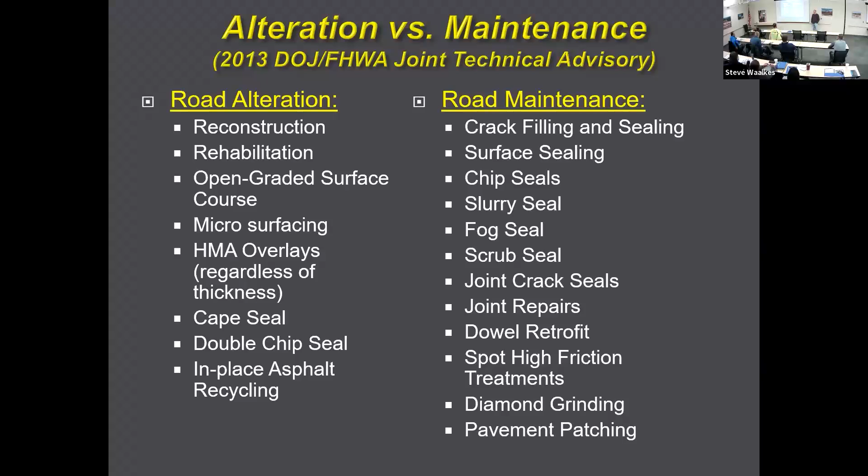However, it's still a maintenance treatment unless two or more treatments contain aggregate or filler. So if you have a chip seal and a slurry seal or a double chip seal, now it triggers an alteration and you have to upgrade the curb ramps. If you just have a chip seal, a fog seal, or a flood coat or something like that, then that would still be considered a maintenance treatment.

But just because it's maintenance and it's optional, it doesn't necessarily mean you shouldn't upgrade the curb ramps. You want to look at the condition of them. Are they in really bad shape? Look at the areas, a nursing home or schools or churches or a lot of walkable community in that area. When you do a maintenance job, you may want to just address the curb ramps as well. So the maintenance is optional.

Okay, ramps to nowhere. So we've all seen this, right? People putting ramps for no reason whatsoever. But you have to look at, are there pedestrian signals there? If there are, you at least have to provide access to the crossing and to the pedestrian activated signal. Is there any evidence of travel? If there's a worn path, then you have to at least provide a curb cut. You at least have to provide access to that same worn path.

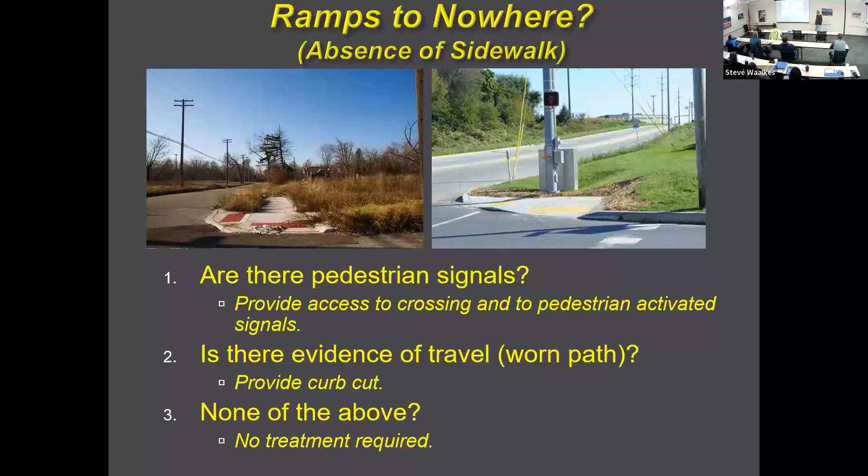If there's nothing there, it's just like grass and looks like there's no evidence of travel, no ped signals, or no ped activated signals, just absolutely nothing there, then no treatment would be required. All right.

So where are you gonna start? Well, you gotta know all the pieces and parts of the thing, right? Start off with the curb ramp opening. That's where the curb ramp's gonna go out into the street. Your ramp runs.

Your landings, where all of your landings are going to go. Your side flares, your roll curb, or even some infield curb there, if you need it. But transitions back to the existing sidewalk. So you'll need something to transition from the compliant, probably curb ramp back to the existing sidewalks. A lot of times they're not compliant sidewalks, so you'll have to warp that transition slab to match up to the existing. And then, of course, the detectable warning surface. So those are all the parts of the curb ramp design and layout.

Site investigation. So a survey is really important. You need to get a good, accurate survey. They're critical for the design and layout of these things. I mean, a little bit off here and there, or they tweak it in the field here and there a little bit, it's like a domino effect, and it can throw off the whole thing. So you want to try to get good design, good survey to lay out these things.

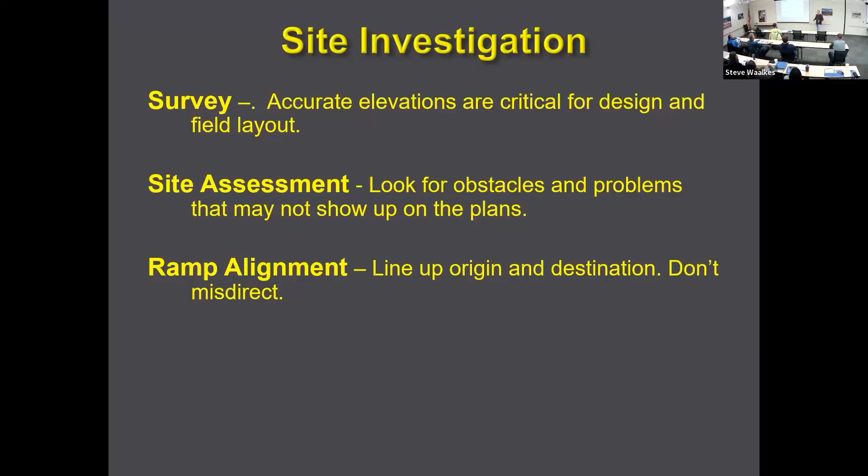Like I say, visit the site. Go out there when it's raining, when it's snowing, like fall, when the leaves are coming down. We're flattening all this stuff out. Things settle where it's flat. So see if the water's ponding. Where's the water going to go if it is ponding? Try to visit the site and assess these things.

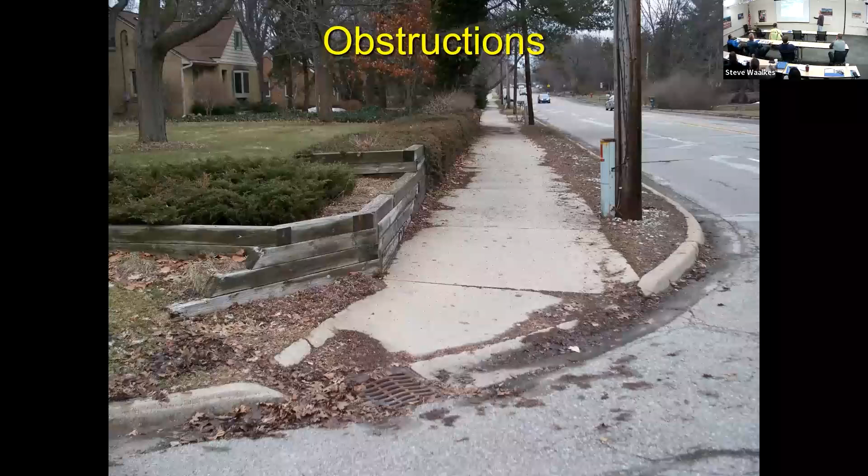Look for obstructions like this catch basin here. That's right in the pedestrian access route. So take a look for things like this. And if it does have a catch basin, does it have an accessible grate on it? An accessible grate has to have a 1/2 inch opening perpendicular, 90 degrees, to the path of travel. So we want to make sure it's oriented correctly.

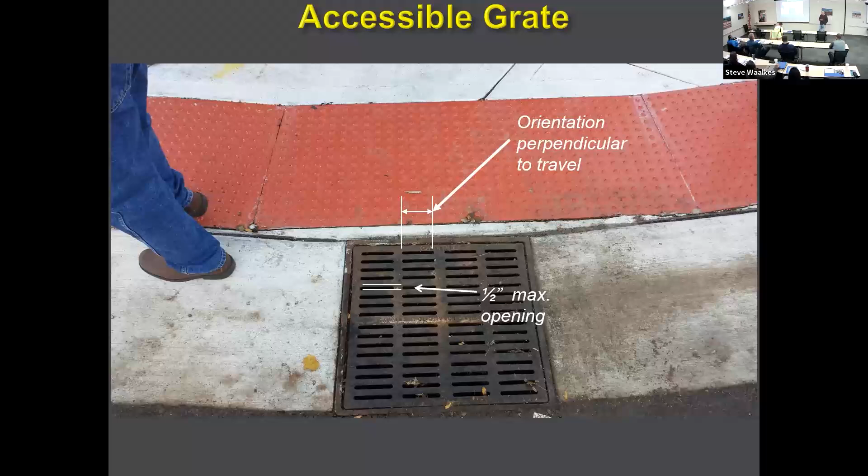And again, these things with the small openings like this can be a maintenance nightmare, right? They catch leaves and trash and all kinds of things and plug them up. And maybe you go out there when it's raining and it's ponding, but they've got one of these that just needs to be cleaned out. So you want to visit the site, check it out, look for these things.

Underground vaults are an obstruction, especially if you're not doing underground utility work. They can kind of get in the way of how to lay out these ramps. Mailboxes and planter boxes, they just put things in the way sometimes without thinking ahead. So that's why it's always a good idea to go out and visit the site, get a good, accurate survey so you can lay them out correctly.

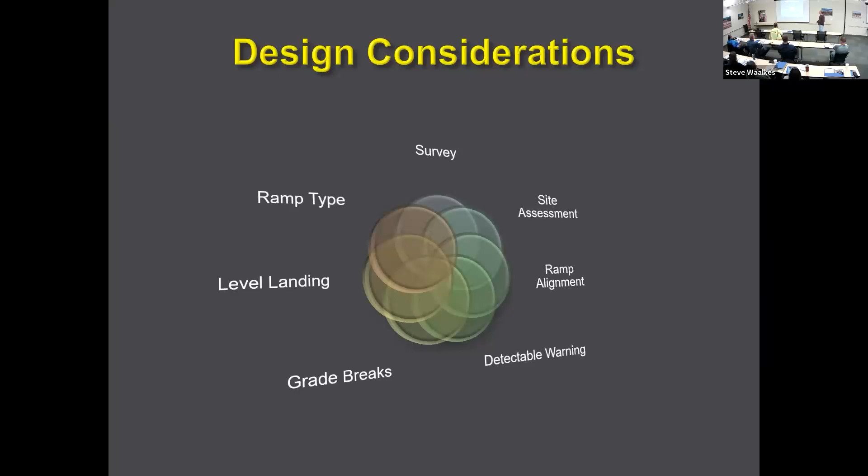Okay, so when you lay these things out and you're doing design, these are some things you want to consider. Obviously, the survey, like we talked about, how important that is. A site assessment, like I just went over, visit it. Ramp alignment, the detectable warning surface, about not misdirecting, and where that's going to be. The type of ramp you're going to put in there. Is it going to be a directional or a depressed corner or whatever? Where the level landings are going to go, and obviously the grade breaks. So these are things that you have to consider when you're designing curb ramps.

Okay, so I'm going to go over a few slopes and runs and cross slopes here in the next few slides. And I just want you to get in your head that there's no construction tolerance on the maximums or minimums on these things. So you want to allow for construction or finishing inconsistencies. For example, we have an 8.33% maximum running slope. That is the absolute maximum running slope. Anything above that is non-compliant. Actually, anything above that, they run the risk of flipping over backwards. They have a lot harder time getting up the ramp. So you want to design for something less than 8.33%, like 7 or 6 or something like that.

And then when they build it in the field, if it does go up, so let's say you design at 7.5 and in the field it ends up at 8, well, it's still compliant, but you allowed for some finishing inconsistencies that were laid out in the field. So you want to try to give them some wiggle room. If you design at 8.33%, boy, they've really got their feet to the fire there.

Same thing with the 5% maximum counter slope. That's the maximum counter slope between the road and the ramp. If it gets worse than 5%, they can get their caster stuck at the bottom. They could tip over. Their footrest could hit the bottom and get stuck there.

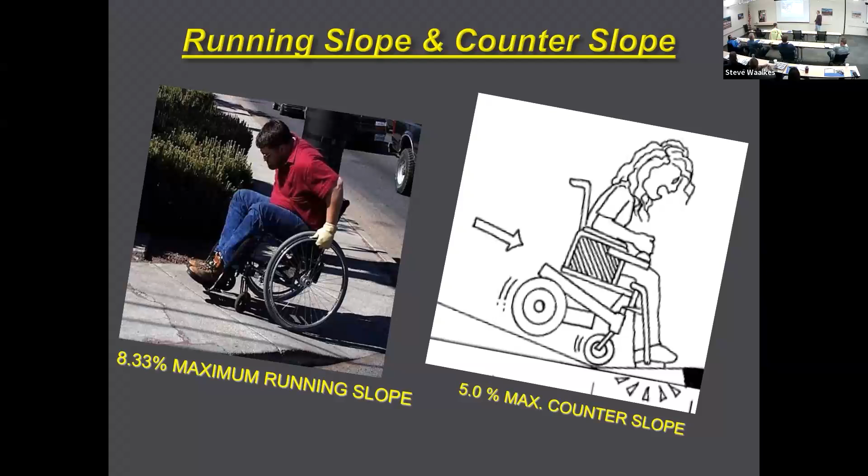Same thing with the 2% maximum cross slope of the ramp and sidewalks. The maximum is the 2% cross slope. So you want to try to design for something less than that, 1, 1.5, try to flatten it out. With anything steeper than 2%, they've got to work really hard on the one side just to try to keep their chair going straight down the sidewalk.

And of course, with the snow and ice that we get here in Michigan, if it's steeper than 2%, if they stop or something, they could just slide right off and get stuck in the grass on the side. So you want to try to design for something less than the 2%. And then it gives them some wiggle room out in the field when they actually build it. But anything more than 2% would be non-compliant.

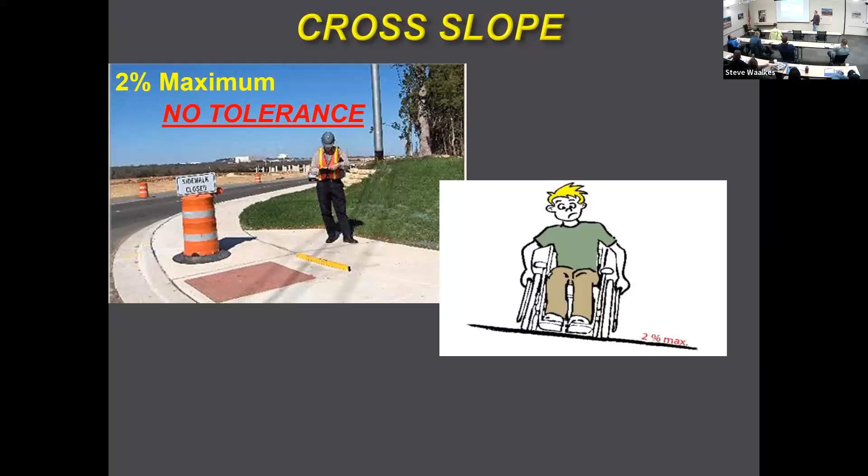Okay. The minimum ramp width is 5 feet. We try to build everything here 5 feet in Michigan. It can be reduced to 4 feet if 5 feet is not practicable. 4 foot is allowed by the draft PROWAG. But we try to build it at 5 if it's at all possible.

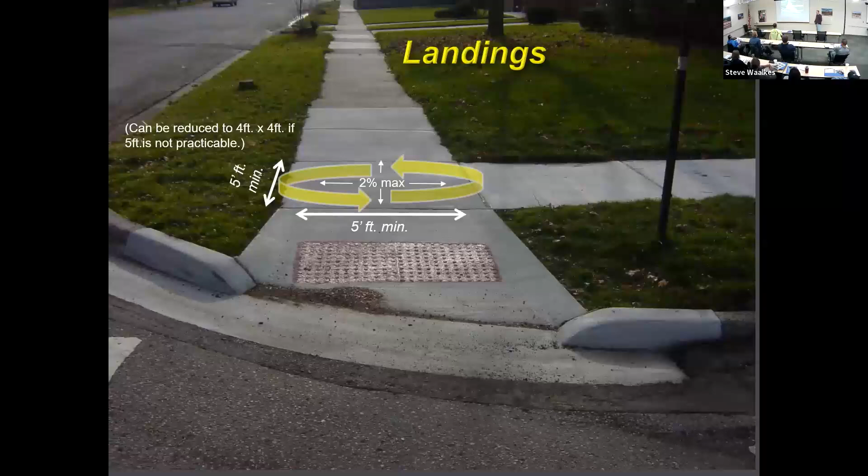Same thing with the landing. The landing is 5 by 5 with a 2% cross slope in both directions. Again, it can be reduced to a 4 by 4. But keep in mind that the 2% cross slope in both directions for a landing is the absolute maximum. So if you can make a landing 1.5 or 1% or something less than 2%, always try to do that. But a 4 by 4 landing is also acceptable if 5 foot's not practicable.

All right, detectable warnings, why do we need them? Well, it advises a change from pedestrian path to vehicular path. So basically it's saying you're leaving a safe area, now you're entering into a dangerous area where vehicles are. It's not a wayfinding device, so we don't want to use a detectable warning surface to point them where they want to go. We want to use the ramp to line up origin and destination. And at MDOT, we have a qualified products list that people can go on and look at that we allow on our projects.

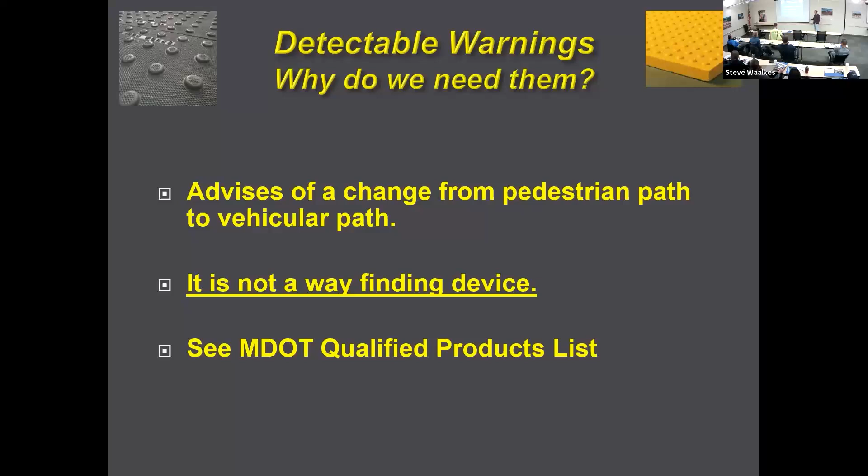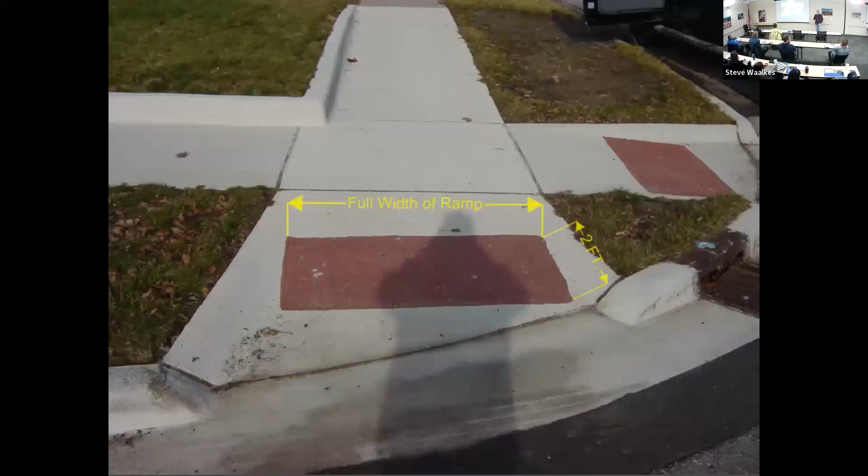That froze up here. There we go. If all else fails, look at the laptop because there's just a little bit of a lag. Yeah, I've seen that. I've noticed that. Yep.

Okay, so the detectable warning surface has to be the full width of the ramp, 2 feet wide at a minimum. And you want full continuous coverage where the curb has been removed.

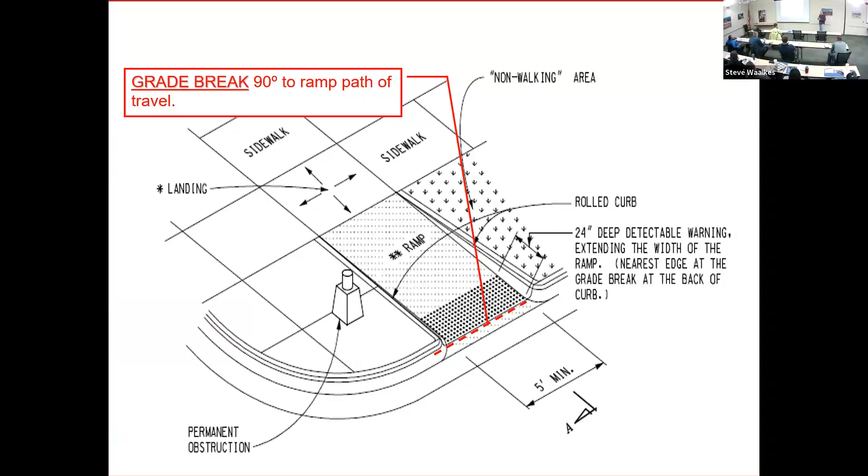So where do you put the grade breaks, right? We have a lot of different grade breaks on these things. You always want them 90 degrees to the ramp path of travel. You'll have them sometimes at the top, at the bottom, at the landing, sometimes you have 2 or 3 or more grade breaks. But you always want to have the grade break 90 degrees to the ramp path of travel. You don't want them skewed.

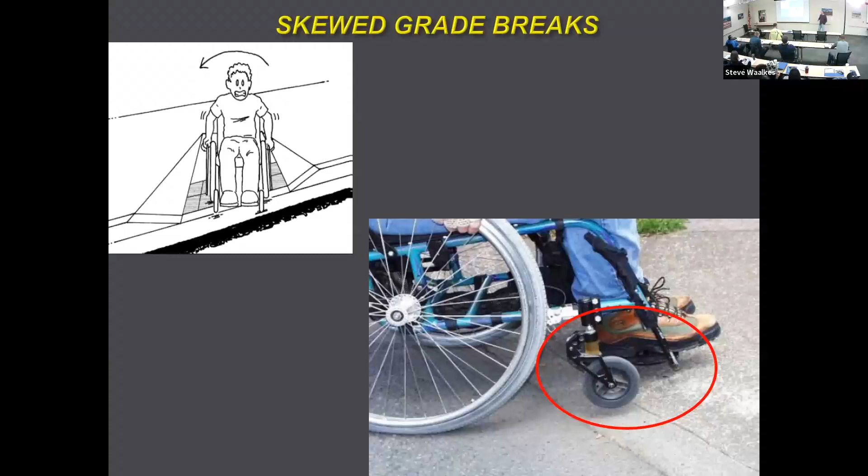Skewed grade breaks are a problem. They can cause the chair to tip, wobble, and all kinds of things. Sometimes they'll get a caster stuck at the bottom because they're on a skew, or they can actually tip over if the skew is bad enough. So we always want those grade breaks 90 degrees to the ramp path of travel.

So how do you achieve a 90-degree to the ramp path on a radius? Well, you move the grade break back. You just move it back some to get that 90 degrees. And that little funky triangle that you get in the radius there, you just want to maintain that as a 2 to 5% running slope. So they'll be able to go over the grade break straight ahead, and then they'll have a nice smooth flush transition out into the roadway.

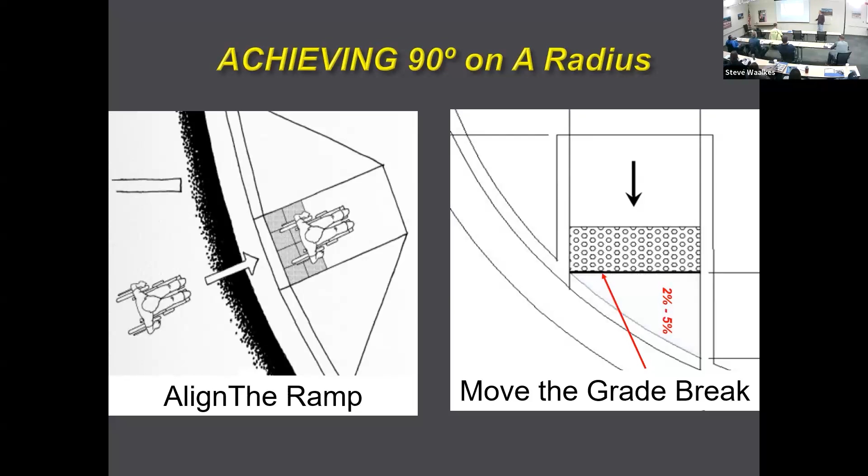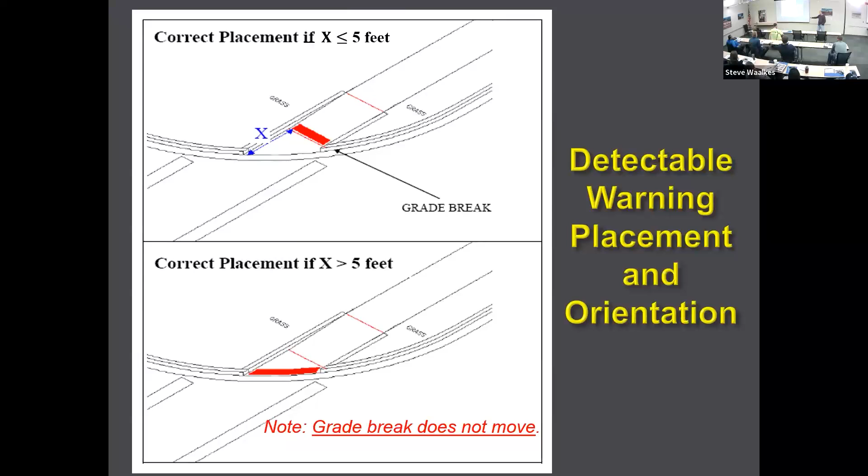So if you have to move the grade break back 5 feet or less, then the detectable warning surface can go behind the grade break. If the grade break is greater than 5 feet, so the grade break goes way back because it's on a radius, then you want to bring the detectable warning surface to the back of curb. And you notice that the grade break's not moving, just the detectable warning surfaces. So you always want to maintain that 90-degree ramp path of travel so they can get over it easily. And so you want to move the detectable warning surface. So if it's less than 5 feet, leave the detectable warning surface behind the grade break. More than 5 feet, bring it up to the back of curb.

And you can also truncate these things. They don't necessarily have to go around the radius, they could be truncated. But if you truncate it, you can have 2 inches at the ends of the radius, and you still want to maintain full continuous coverage across the entire opening of where the curb has been removed. All right.

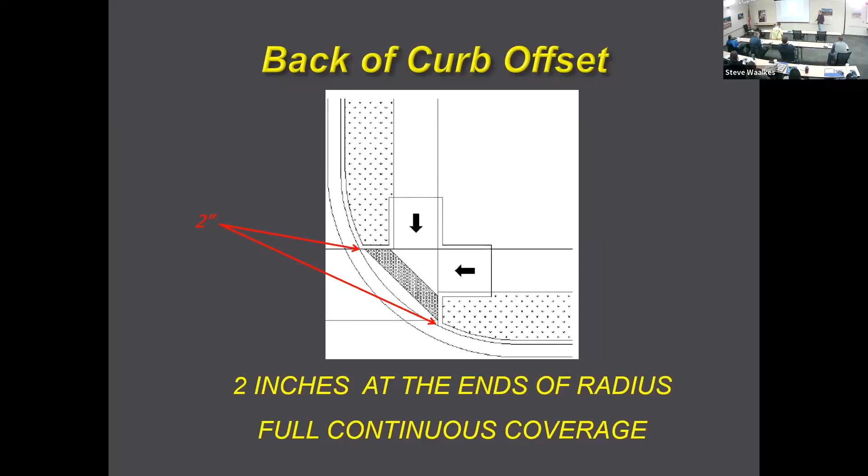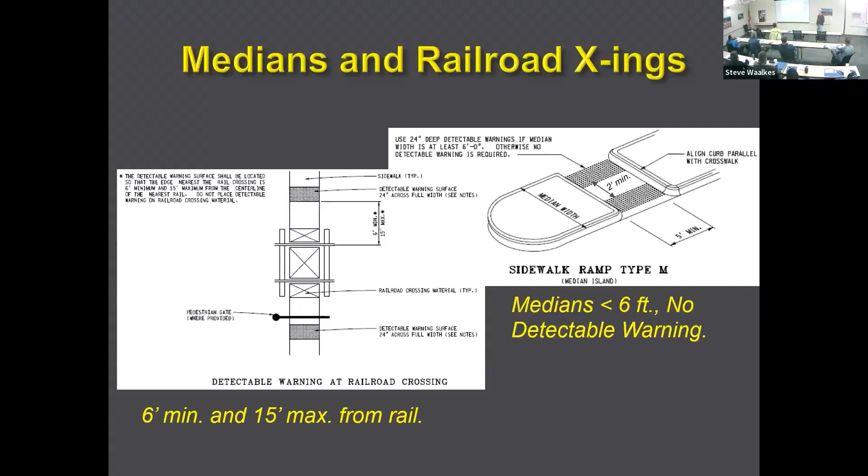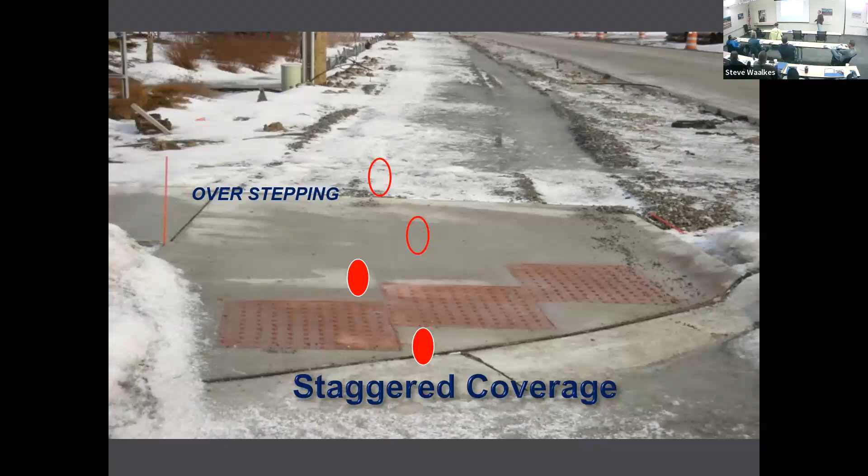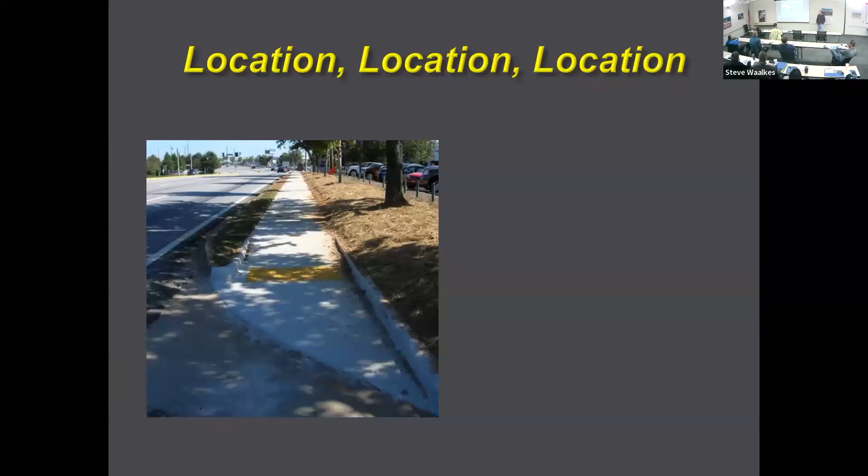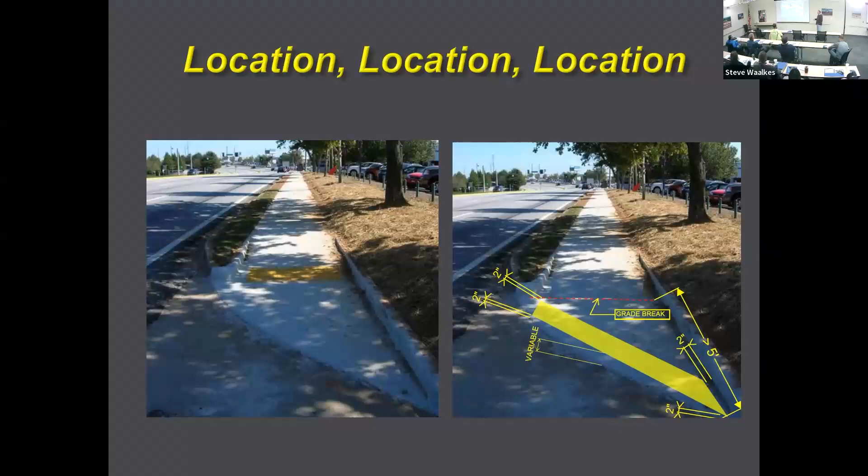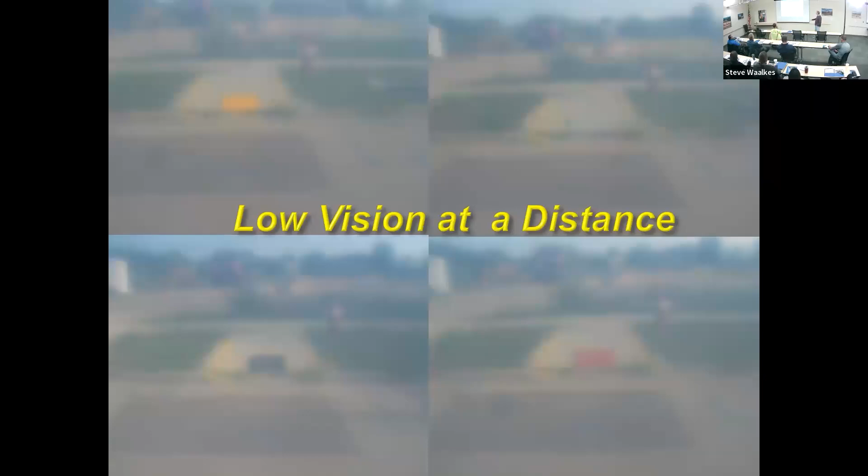So yeah, low vision at distance, you can see the gray on gray just washes out and the black on gray is a little harder to see. But the yellow and the red seem to work pretty good. But you wouldn't want to use red on red brick, right? So sometimes municipalities, they like the brick, so that looks good, but they don't want like a yellow one there, right? They're like, oh, the yellow is too bright, it doesn't match our decor or whatever.

So it may be something like a gray one. It's a little better. It's not so over the top, but it's a better contrast. It's not the best. Obviously, yellow would probably be better in this situation, but this would be a good negotiating point, right? So you just want good contrast for them to be able to see it.

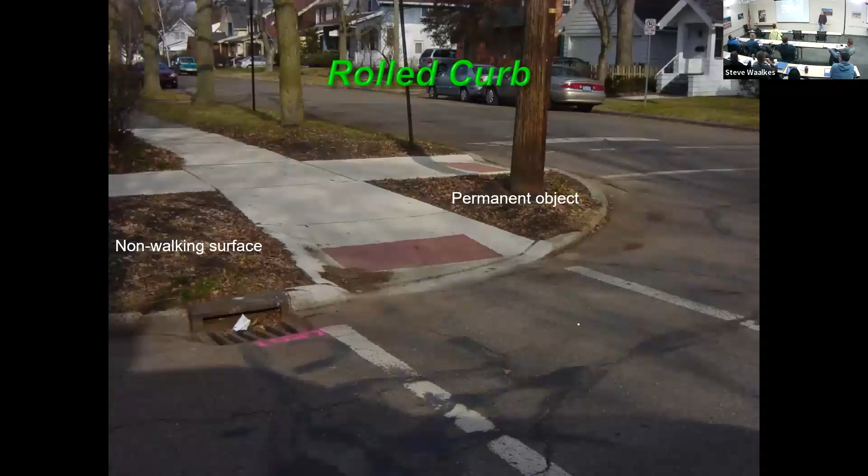Rolled curbs and flares. So you want to use rolled curbs adjacent to non-walkable surfaces, permanent objects, things like this, where you don't expect anyone to be walking there. They shouldn't be walking there. It's not a prepared surface, or there's too many obstructions. You wouldn't want to use it adjacent to walkable surfaces, right? Because people are walking, all of a sudden it just drops off, or there's all of a sudden a lip, they kick it, trip and fall over. Everyone's playing with their phones and watching cars go by. So you wouldn't want to get someone injured by one of these things.

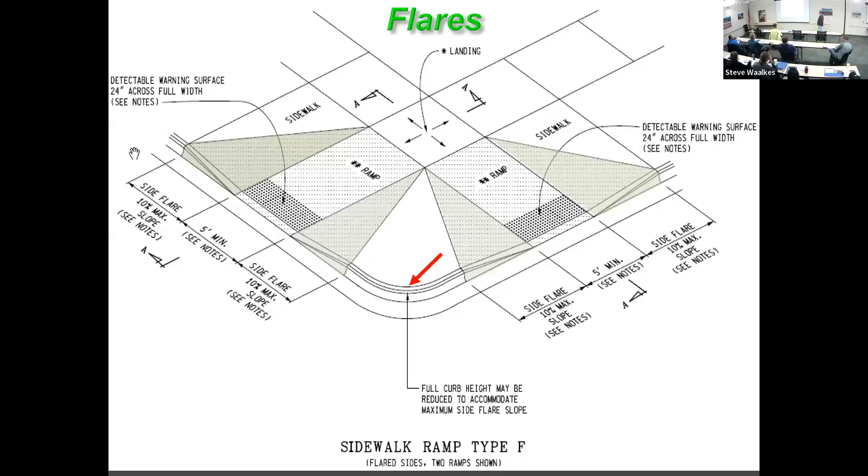So next to walkable surfaces, you want to use flares. So they have a nice transition between the ramp and the sidewalk, and they can just walk right up the ramp and the flare and right onto the sidewalk and keep walking along. We can also do hybrid ones where you have returned curb next to non-walkable surface areas, and flares that would connect to walkable surfaces. And in this situation here, we can even reduce the curb height around the radius a little bit to achieve the flare slopes. So you don't want it too steep, so you can lower the curb height a little bit to meet the maximum slope of the flares.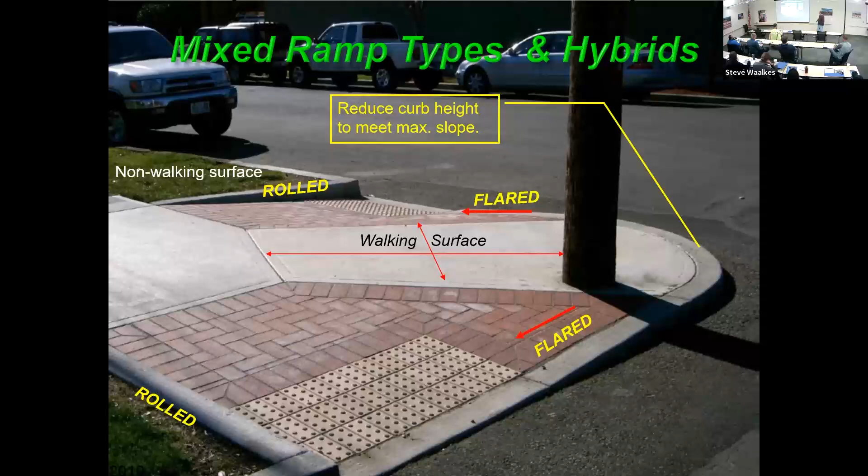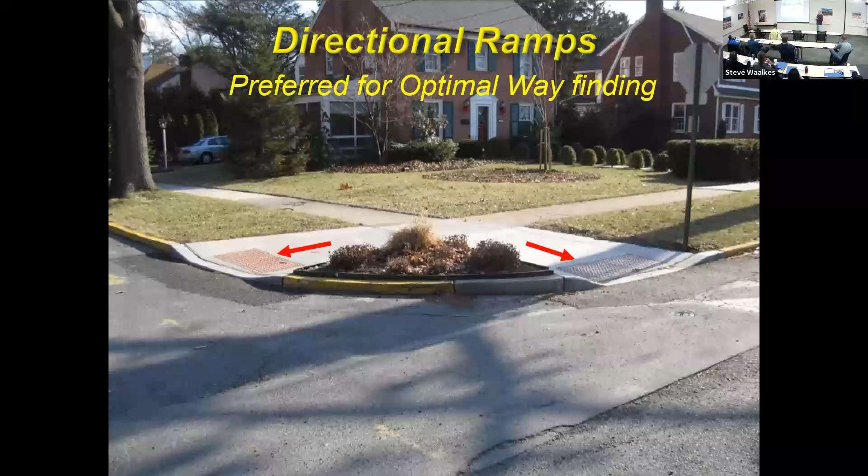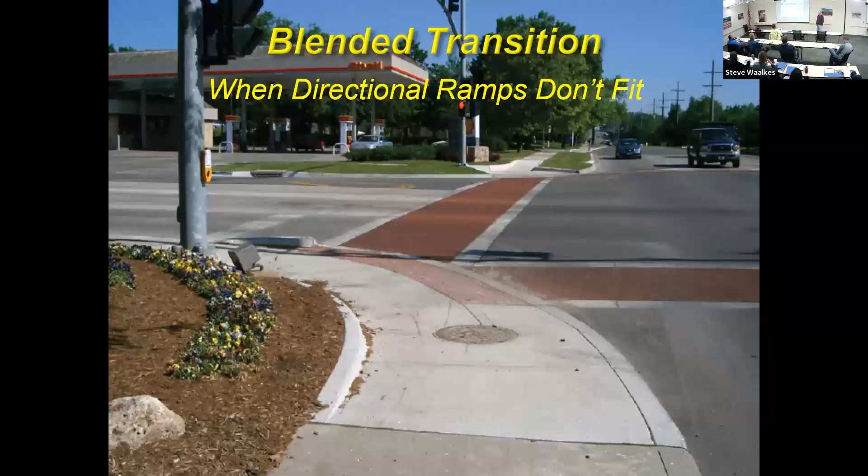Okay. The different types of ramps. Directional ramps. These are the preferred method of ramps. They're independent of each other. You can use them to line up origin and destination like we've talked about. They come off the sidewalk, the ramp is pointing them right where they need to go, in both directions. That's the preferred optimal method of wayfinding. So if we can fit these in, try by all means the best you can to get these to work. But we all know sometimes that doesn't happen, with right-of-way constraints, obstructions, scope of work, things like this, we just can't fit those in.

So we have blended transitions when directional ramps don't fit. So with a depressed corner, when the directional ramps can't fit, you just want to lower that whole corner down, make that whole area 2% maximum in all directions, and make that your landing down at the bottom of it. And then you want to ramp it back up to the sidewalks. But if you have to do a depressed corner, you want to make sure you have full continuous coverage of the detectable warning surface all the way around the radius wherever the curb has been removed. So that gets them off the road, they can turn, and they can go either way they want.

So here's a parallel ramp. So basically, they just get off the road nice and flush. The landing's at the bottom, 2% in both directions. They just make their turn and go on the ramp to tie back into the sidewalk.

You may or may not need landings at the top. That's the question marks for. Depends on the 15-foot rule and the amount of rise, you know, the 30 inches of rise and things like that. So it depends on your situation and what it's like out in the field. You may or may not need other landings at the top of those ramps.

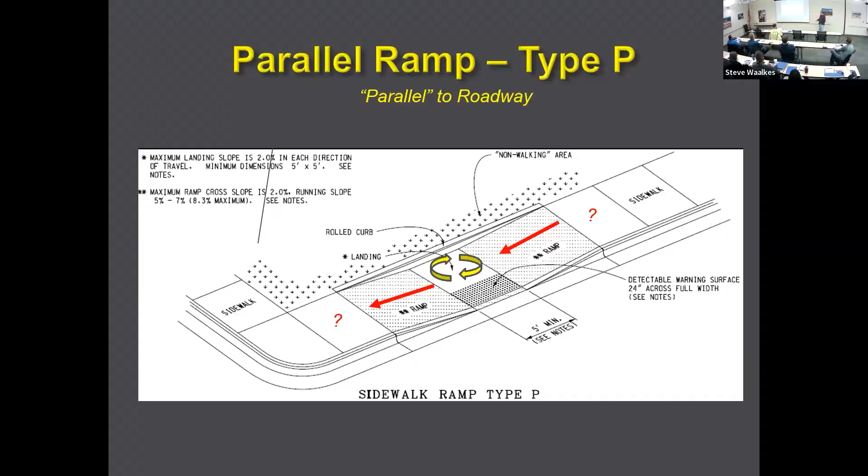Okay. Here's a combination ramp, a type C. Basically, you have a ramp that comes off the road. You go up the ramp to the landing like a perpendicular ramp. And then you have your landing at the top, you make your turn, and then you go back up your other ramps to match up with your existing sidewalk.

And again, at the top, the question marks are there, because you may or may not need another landing at the top. So you just ramp up and do the turn and then go. It's a combination between a parallel and perpendicular ramp.

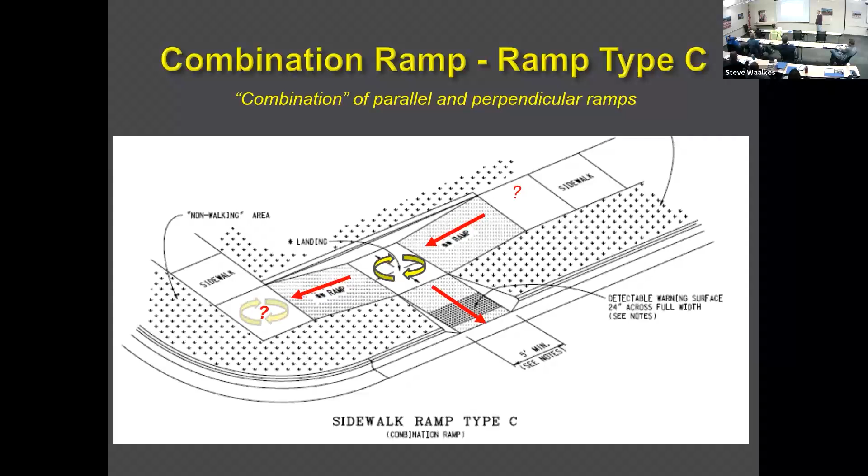All right. Well, that's not right. What happened here? Is it not showing on here? No, I wonder, but it's that one. Oh, that one just changed. It was on there a second ago. Yeah, I think the Wi-Fi connection in here is unstable. Oh, yeah, we have that problem too sometimes. Then it just kicks him right out. We're at the diagonal ramp. This one, right? Yeah.

Okay. Diagonal ramps are allowed in alterations, not for new construction. Like I said, if you're building a brand new roadway through a cornfield or the forest, these are not compliant. You're not allowed to put these in. You're supposed to put in directional ones if you can, because basically they allow for 3 points of entry, whereas the other one...

Is it not? I don't know, it's not doing so. Want to go back? All right. Well, hopefully that works.

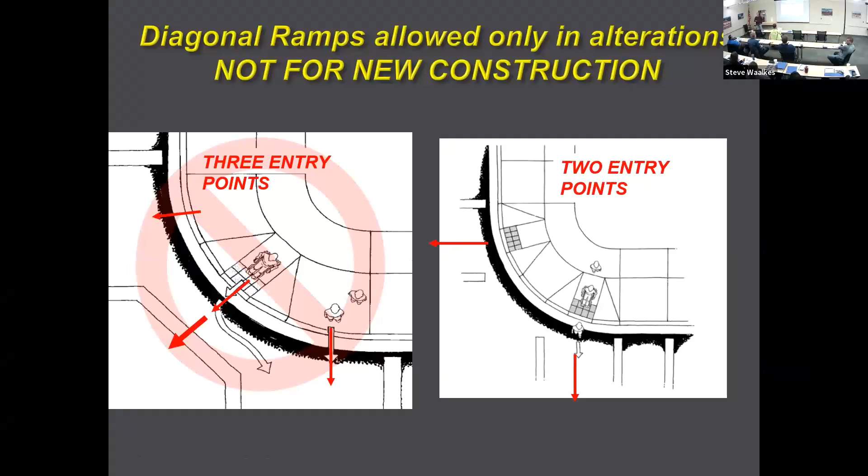All right. So this has got 3 points of entry on a diagonal ramp, where the other one would have 2 points of entry. And if you already have a diagonal ramp existing in an alteration, if you can, by all means, try to take them out and put in directional ones or something else, because they kind of point kitty corner, through the middle of the intersection. And again, we want to try to line up the ramp from origin to destination.

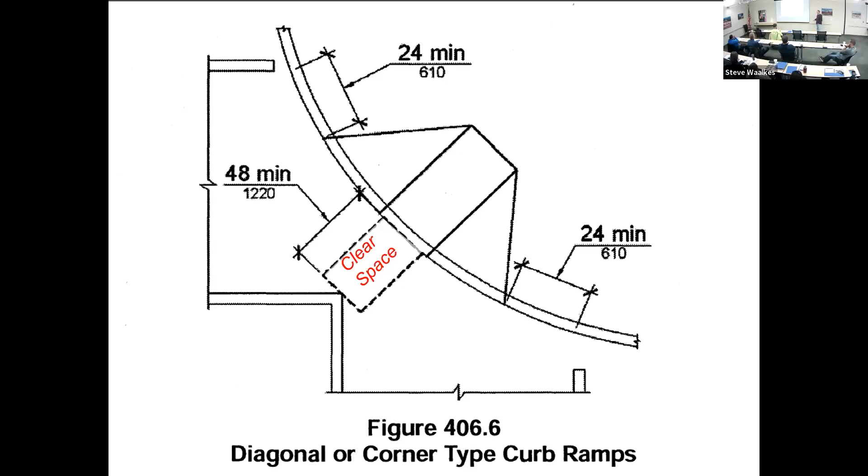So if possible, take them out and put in directional ones, so you point them in the right direction. However, if you have to leave them in and you upgrade them as a diagonal ramp, you at least have to have a clear space within the crosswalk for them to get out from the ramp into the crosswalk, make their turn in this clear space, and then continue across the road. So you have to consider that. But if we can eliminate these, by all means, try to do so.

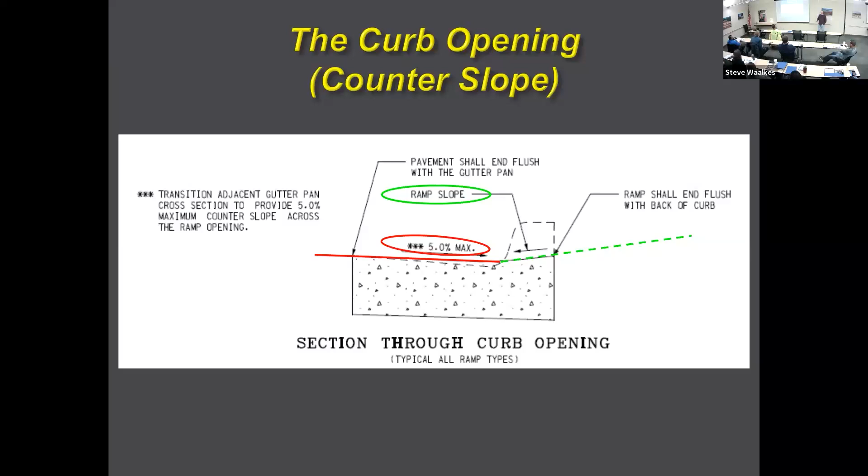Okay, the curb ramp opening, the counter slope. Remember, that's a 5% maximum counter slope. We want to design for something less than 5, because their casters can get stuck at the bottom. So what you've got to think about is the gutter pan. The gutter pan is about 8%, and now you're flattening it out to less than 5%. So you have to take out extra curb and gutter on both sides of the curb ramp, transition the gutter pan to something less than 5% across the curb ramp opening, and then transition to something steeper on the other side.

So that goes hand in hand with how important it is to get a good survey, to visit the site when it's raining. Because now you're flattening everything out, so where's the water gonna go? Changing the gutter pan line, all of a sudden the water's gonna go there and stop. It can't go around the radius anymore because you flattened it out. Or maybe there's enough slope that it still will. But keep in mind that it's 5% or less in the curb ramp opening, and to achieve that, you're gonna have to take more curb and gutter to make that compliant.

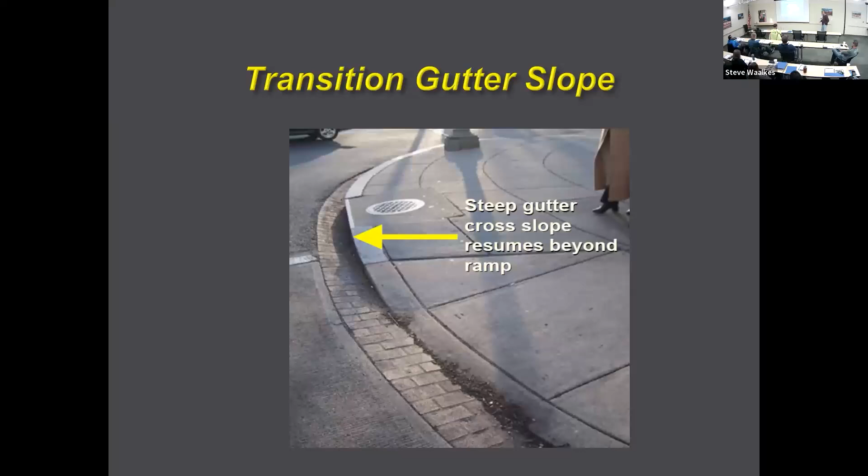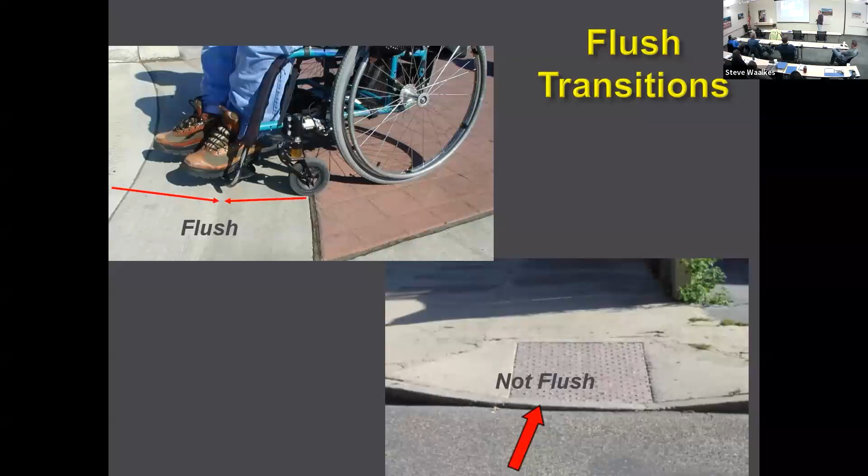So you get a nice smooth flush transition between the curb ramp and the road. So it makes it nice and easy for them to get out, no bumps. You don't want that one down here; it's not flush. You don't want them stuck on it or have a hard time getting over that. You want a nice smooth flush transition between the curb ramp and the road. And that's achieved by having that counter slope 5% or less.

There are vertical surface discontinuities. So, pavement moves around, all these bricks move around, we get it. So they allow 1/4 inch or less with no treatment required. So if it's a 1/4 inch or less vertical surface discontinuity, they can just carry on. If it's 1/4 inch to 1/2 inch, it should be beveled at a bare minimum. And 1/2 inch or greater, it's ramped. So if you have vertical surface discontinuities, you want to take a look at how much difference there is, and then determine if you need to bevel it or ramp it.

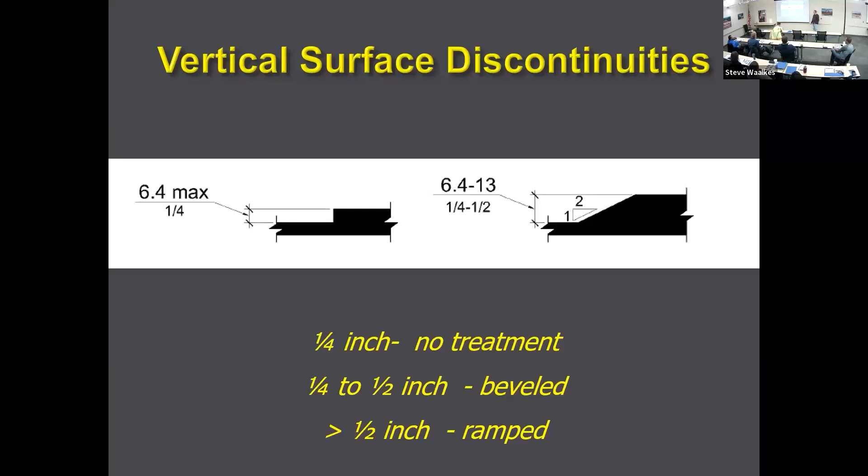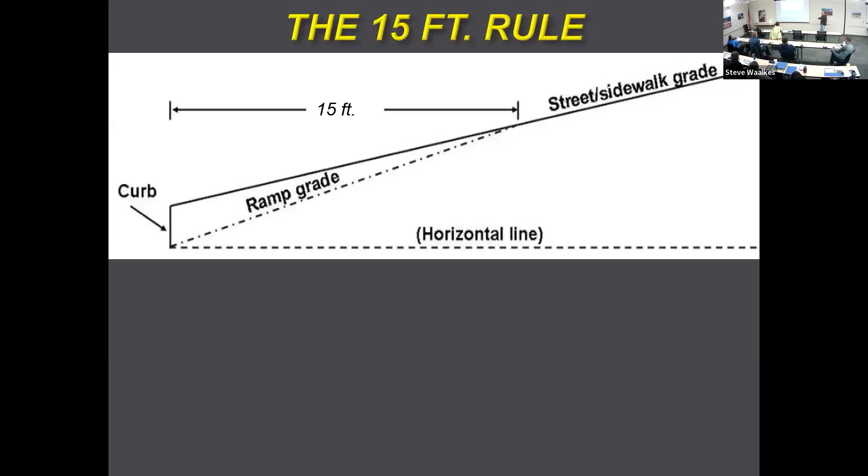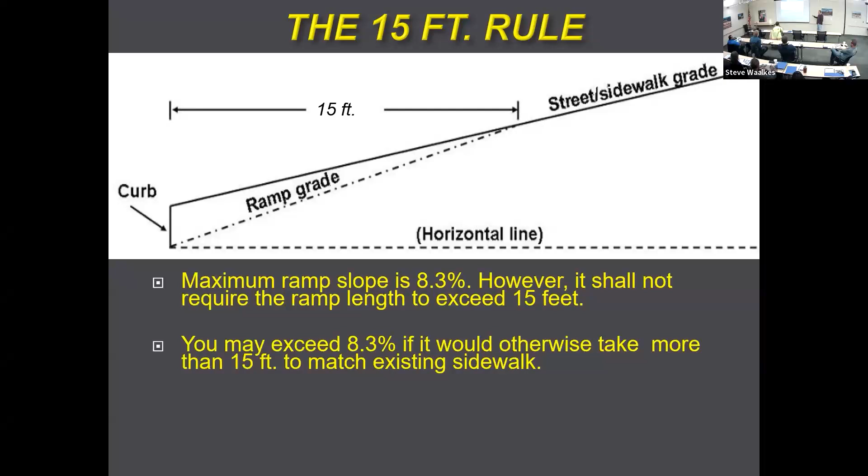Okay, chasing grades, right? We probably all run into this. We go back, and now we're compliant, then we've got to go back and we're working. It's like this never-ending story, right? So they came up with the 15-foot rule. Essentially, the maximum ramp slope is 8.33%. However, it should not require the ramp length to exceed 15 feet. So if it turns out you're chasing grades, you can stop at 15 feet. That means in 15 feet, it could be 9% or 10% or something, steeper than the 8.3%. So you can exceed 8.3% if it would take you more than 15 feet to match existing sidewalk.

However, unlike the construction tolerances I mentioned earlier, this is not an absolute maximum. You can consider reasonable increases in distances to achieve a compliant running slope. So for example, at 15 feet, let's say it's 8.5%. It's higher than the 8.3% in 15 feet. Yeah, sure, you can stop there. But you should consider, what if you took another flag, maybe if you went 20 feet or 2 flags, 25 feet, and it brought that 8.5 to like 7.9 or 8.2%, something less than the 8.3%. You guys should consider that.

Think about that, especially in the area, because Dan Troy used to talk about how they only had to take a couple more flags to make it compliant, but they left it at 15 and the guy was taking his wheelchair in the street. So consider taking extra flags if it would make a compliant running slope. Sometimes it doesn't; sometimes you go out 30, 40 feet and it's still going to be 9-10%. Well, then you have to balance all the requirements and the accessibility, and determine where's enough. But with the 15-foot rule, you can consider reasonable increases in distances to try to make it a compliant running slope.

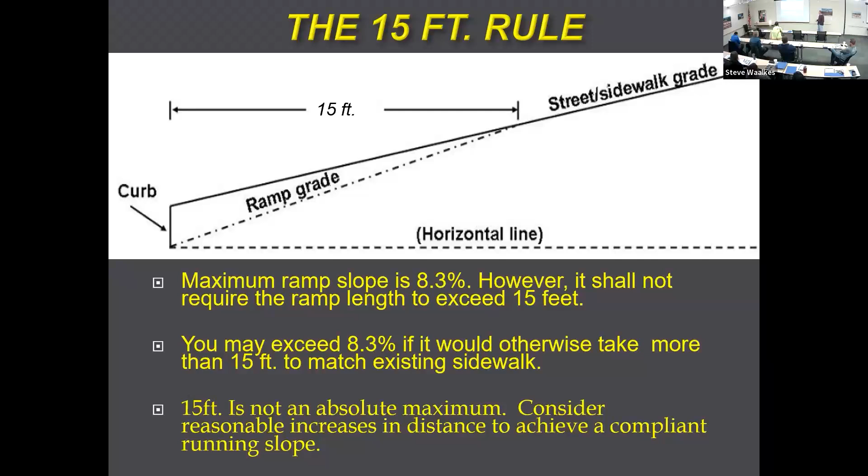Okay, so the 15 feet doesn't count landings and transitions. So you want to start at the grade break and then just count your ramp runs. So you'd have your first ramp, then a landing, and then your ramp. And then you'd have a transition slab between the last ramp and the existing sidewalk. So landings and transitions are not counted within the 15 feet. So keep that in mind as well.

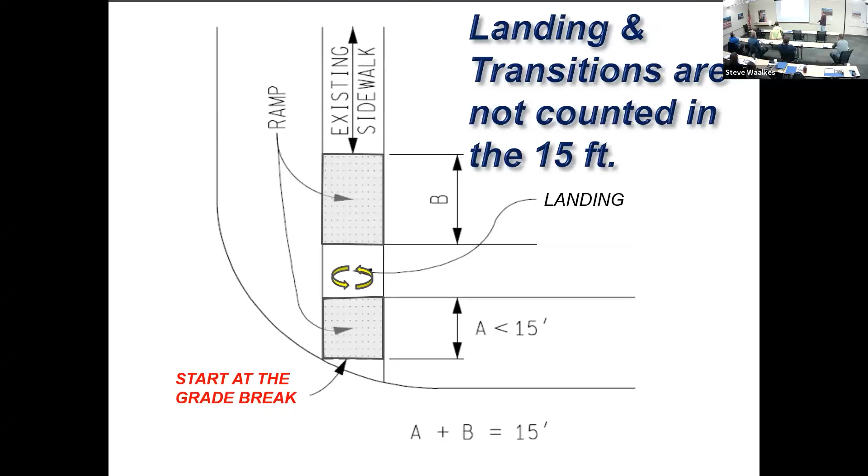Sidewalk grades: it's a 5% maximum sidewalk grade. The sidewalk can exceed the 5% to match the existing road profile grade, right? So basically that means if the road is at 6 or 7%, let's just say 6%, the sidewalk grade can match the road profile grade. So your sidewalk grade can be 6% as well. Now, if you exceed the 5% and the road profile grade, then the ramp rules are going to apply.

So let's say your road is at 6%, your sidewalk is at 7%. Well, now you've exceeded the 5% and you've exceeded the road profile grade. So now you're going to apply all the ramp rules: the maximum is 8.33%, 30-inch maximum rise with 5x5 landings.

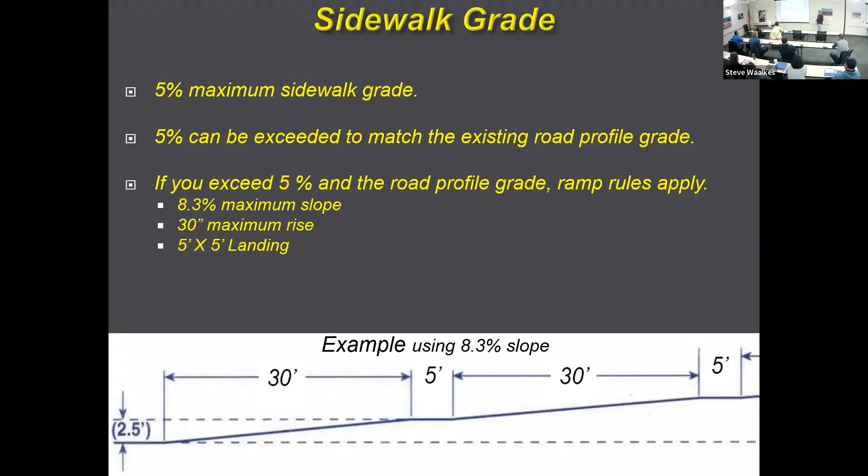Okay. All right, there it goes.

Landings. Again, remember, we mentioned this slide earlier. The landings are 5x5, right? We want to build them 5x5. If they don't fit, you can make them 4x4 if they're not practicable. They're 2% cross slope in both directions; again, that's the maximum, so design for something less. They're required at perpendicular ramps, so you have to put those in on perpendicular ramps. If there's an intersecting sidewalk here, you want to make sure that you have a turning space there. But they're not required at blended transitions where the ramps are less than 5%.

So what do you guys think? Do you think you need a landing there? It's a trick question. It depends. It's a perpendicular ramp, so yeah, you need it at the top of the perpendicular ramps. However, it's not required at blended transitions. So if this ramp is less than 5%, let's say it comes off the road at 4% or 3.5% or whatever, you're not going to be required to have a landing at the top of it. It's just a continuation of the sidewalk if it's less than 5%, but you still need to have the detectable warning surface in place.

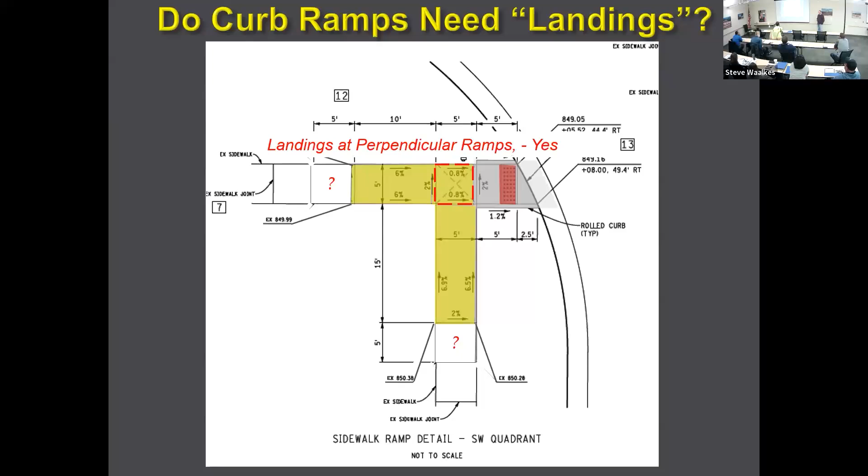Okay, so what about the question marks? Do you think you need them at the top of the ramps there? Maybe, I don't know. I didn't bring my calculator with me, but it's 30 inches of rise. Oh, and a 15-foot rule makes a landing requirement unlikely. It would take a 17% slope to gain 30 inches in that 15 feet. So at the top of those, it would probably not be required.

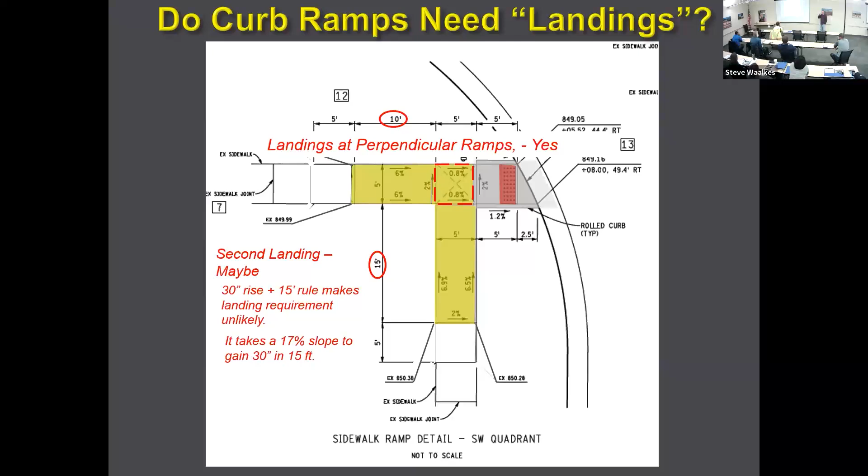Matching cross slopes to road grades. New roadway, again, real quick: full compliance is going to be required. So if you build a brand new road, a 2% maximum at stop signs, 5% at signalized or uncontrolled intersections, and match the road profile grade at mid-block crossings. Existing roads, you want to transition to meet the existing road grade. Adjust crosswalk to the extent practical to reduce cross slope if new construction standards are impractical.

So basically, you're allowed to match the road profile grade, and you can exceed your 2% cross slope and some of these things. But if possible, you want to apply the new roadway construction. So if you're doing a mill and fill or road construction or something, you can try to get to 2% at stop signs, try to get to 5% cross slope at signalized or uncontrolled intersections. And then matching road profile grade at mid-block crossings, that's going to happen anyways.

Bill? We've got a question on the Q&A portion of the Zoom. What about chasing cross slope for 15 feet? Do you include the landings and transitions then? No, you wouldn't include the landings. You don't think of it as one piece or one part that you're trying to do within the 15 feet. You just want to try to have a compliant running slope, a compliant cross slope, compliant landings, and everything compliant within that 15 feet. And then the transition slab is to get you back to match whatever's there, whether it's compliant or non-compliant.

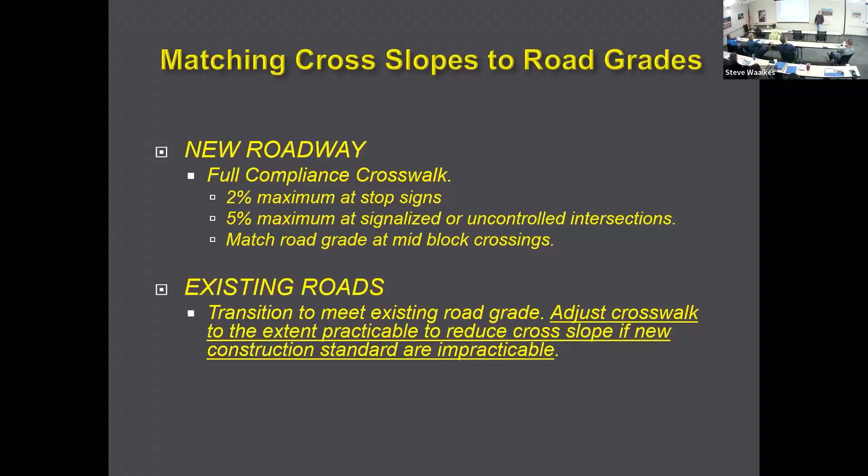So for example, you start at the top, right? You got a landing that's 2% cross slopes in both directions. And you have an existing cross road or existing road that's something greater than 2%. So you have to transition the full length of the ramp. So you'll start at the top at a 2% cross slope, but at the bottom, it's something greater than 2%. So you want to have a nice smooth transition over the entire length of the ramp.

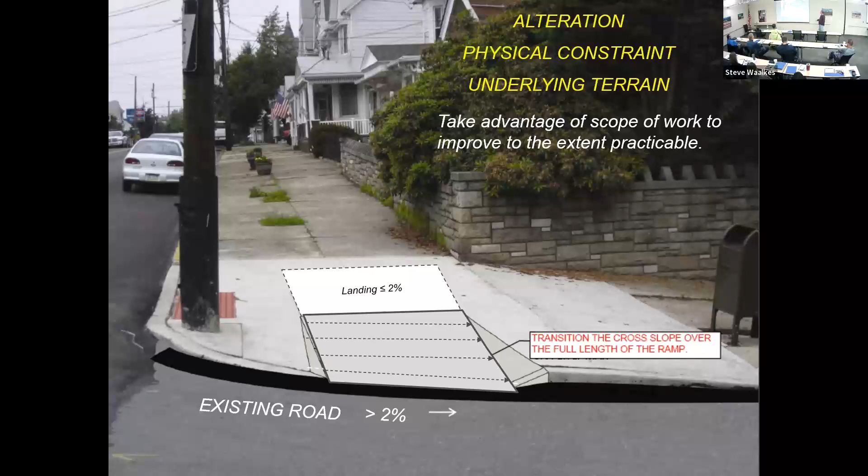You don't want to carry that 2% down for like half the ramp and then flip it to something more than 2%, or 2/3 or anything like that. You want to have a nice smooth transition from the top to the bottom, so it doesn't have any possibility for them to tip over or go over a break or anything like that. So you want to do a nice smooth transition between the landing and the road.

Path of travel. Buildings, pathing to accessible features. For buildings, they said that in the ADAAG, everything needs a path to accessible features. But in the PROWAG, it's public rights of way, it's just too massive, it's too big. So we just can't have paths leading to every single accessible feature within the right of way.

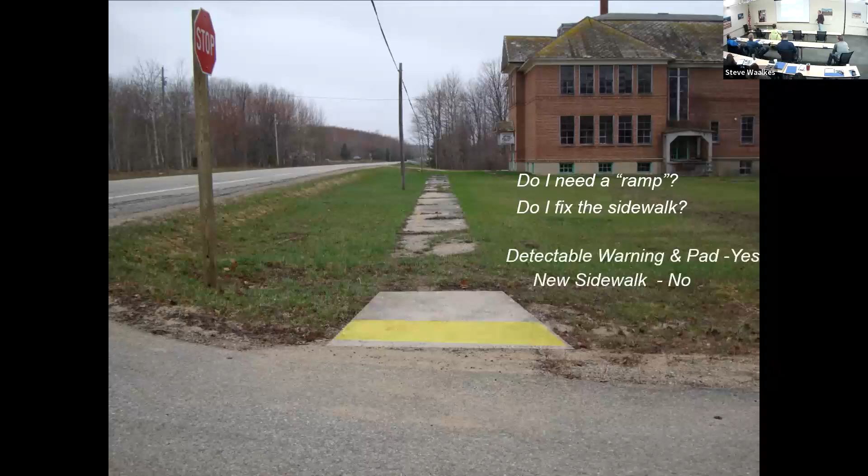So, okay, what do you guys think of this one? Oh, I got questions on these slides too, okay. All right, first off, do you need a ramp? What about the sidewalk? Do I gotta fix the sidewalk? All right, a detectable warning and pad, yes.

Okay, at a bare minimum, so this is the difference between MDOT jobs and local municipality jobs. MDOT, we'll do a mill and fill on our road and we'll take care of the curb ramps and the openings and things like this. Unless there's some special agreement, we won't address the sidewalk. But if this was like a Delta Township job or a city job or something, those guys own the sidewalk, right?

So when they go through it, they'll want to fix the ramp and they should be considering replacing the sidewalk or fixing it up or whatever. But for an MDOT job, we just go through and put a detectable warning and pad and we wouldn't address the sidewalk.

All right, so what if there is no sidewalk? Remember we talked about ramps to nowhere earlier? Well, I think I got a question. There's no ped signal, right? There's no evidence of travel. So no treatment should be required.

So if you had a ped signal, they put in a ped signal, you'd at least have to have a refuge. If ped signals are present, you have to have a refuge. You have to have a place for them to get off the road, sit there somewhere safe, wait for the signal to do its thing, and then turn around and go back.

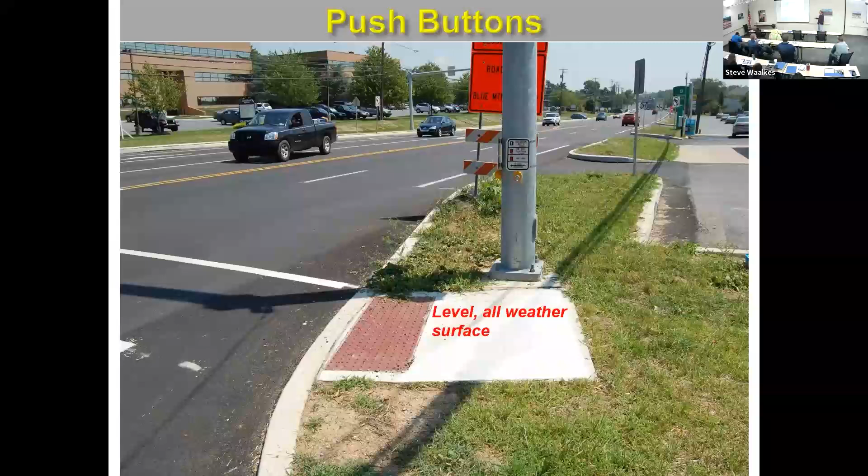And the refuge should be a level all weather surface. So they can just get out of the road, hit that button, turn around, and at least go back in the direction they came from.

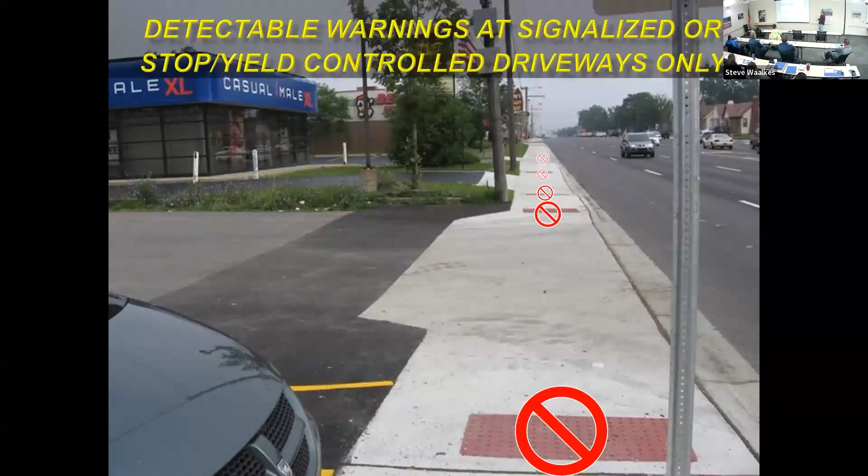Ramps, detectable warnings and driveways. All right, what do you guys think here? You need a detectable warning at all these driveways? Absolutely not. Basically, detectable warnings at signalized or stop or yield controlled driveways only. So it has to be a regulatory sign, official stop sign, official yield sign, traffic signals, things like this. Then you would have to have detectable warning surfaces.

Yeah, this is too much. It can't be like a mom and pop sign stuck in a concrete bucket, you know, with "please stop," things like that. It has to be an official regulatory sign. I get a lot of questions about all retail areas like Meijers and Walmarts and things like that. Basically, again, if it's stop, yield control, or signalized, it has to have detectable warning surfaces.

The good rule of thumb, Steve said it the other day: if it acts like a road, looks like a road, quacks like a duck. Yep, if it looks like a road and acts like a road, you should treat it like that, right? Exactly right. All right, so that's when you would put in the detectable warning surfaces.

Oh, we've got another question. Sure. Can a pedestrian traffic study eliminate some ADA requirements when there are no pedestrians in a rural area? Well, we don't ever want to remove accessible features. So it's never a good idea to remove any ADA requirements, even though in some rural areas there are only going to be a few people. So we still have to have ADA requirements. It still has to be accessible to everyone. Yes. Okay.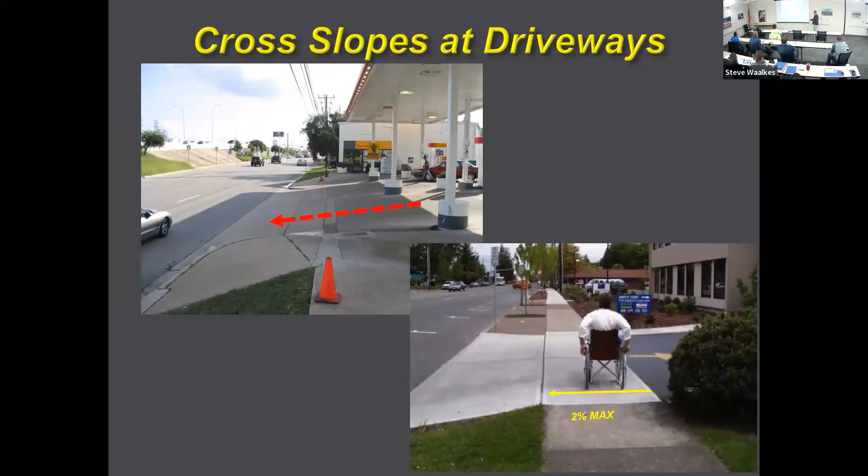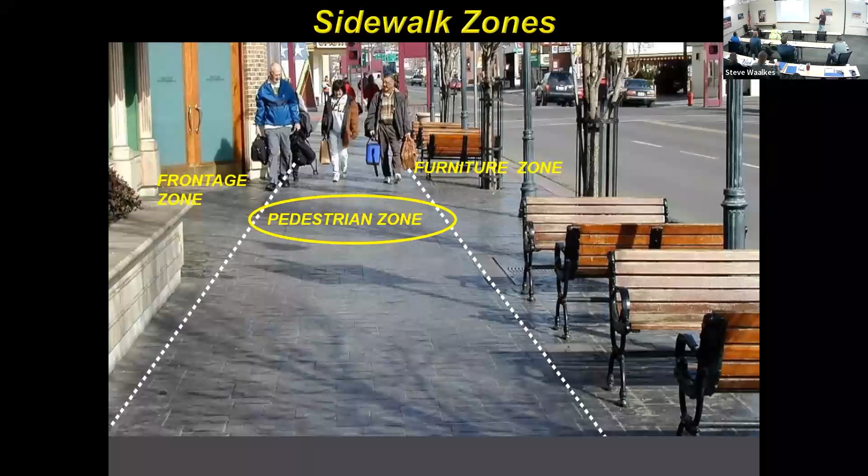Sidewalk zones, we have 3 different zones. We have the frontage zone, the pedestrian zone, and a furniture zone. The pedestrian zone is the only zone that we're concerned about maintaining the 2% cross slope.

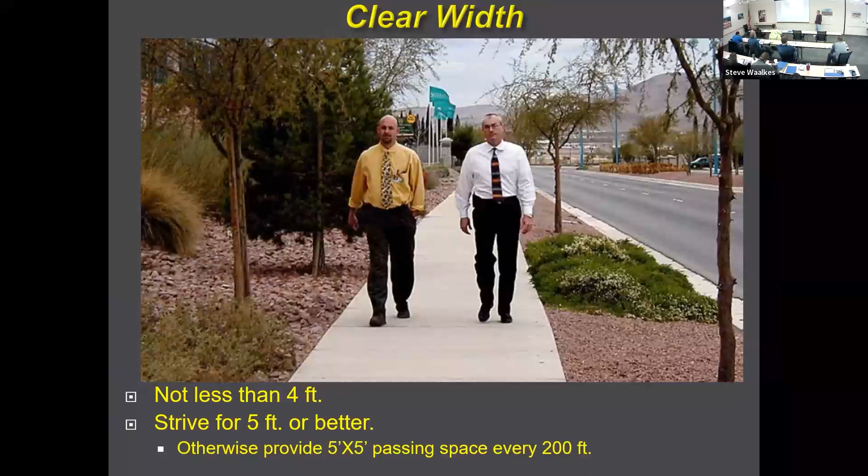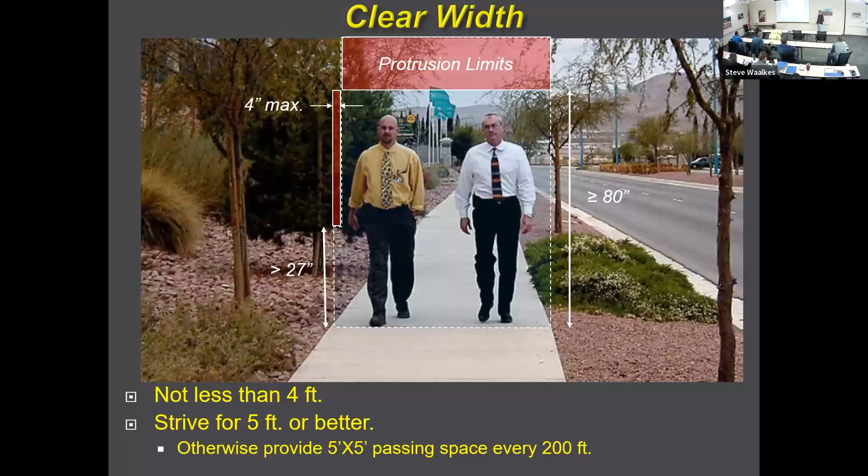Okay, so this goes hand in hand with the question about the clear width for a sidewalk. Again, we try to build all our sidewalks here in Michigan 5x5, right? 4x4 works, you can't make them less than 4 feet, but you want to try to build them 5 foot wide or better. If you build them at 4 feet, you have to have a 5x5 passing space every 200 feet. And you're allowed protrusion limits for signs and low hanging trees and so on, but it'd be 4 inches maximum on the side and no less than 80 inches. But we want to try to build these things at least 5 feet if possible.

Physical constraints: where physical constraints make it impractical to fully comply, compliance is required to the extent practicable, and then it must be documented. So basically what that's saying is if you can't make it 100% compliant, you make it the best you can. Do the best thing you can to make it as accessible as possible. Even though it's not compliant, you built it to the extent practical to try to make it accessible. And then since it's not fully compliant, you want to document it.

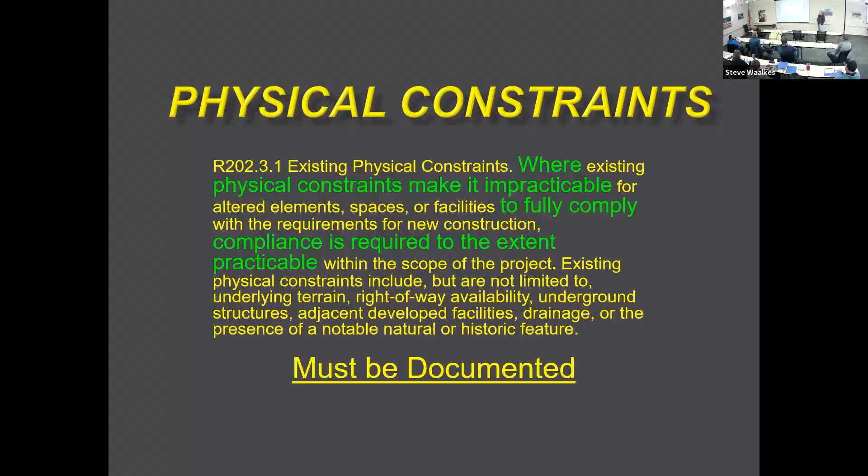We at MDOT have a form. I'll show you the form coming up. But you guys may want to create your own forms. Feel free to steal our form, it doesn't matter to me. But you should at least document it and keep it with the project files. Because you never know, some attorney may come knocking on your door saying, what's going on here? And then you'll have documentation to back up how you came to that decision on how you made it or built it.

All right, so constraint arguments are only valid for alterations, not for new construction. Remember, new construction is brand new, you have a blank page to play with, you need to have full compliance. So you can't build something brand new and say, well, I had constraints. You should have thought about it. So constraint arguments are good for alterations, but not for new construction.

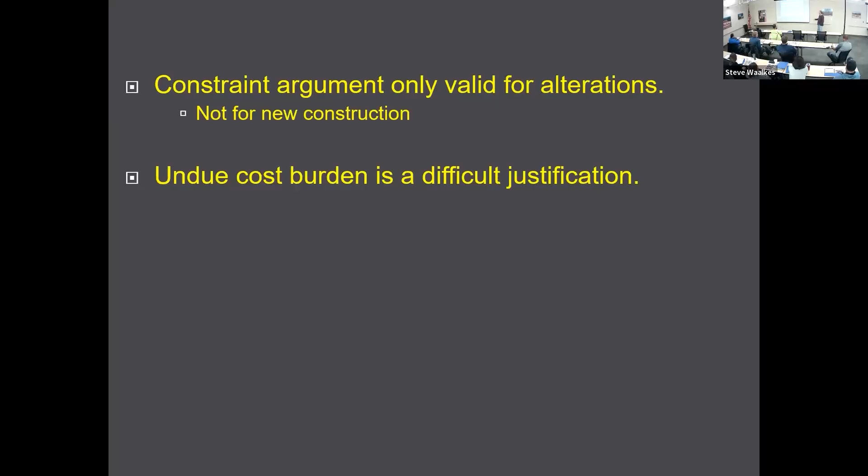Undue cost burden is a difficult justification. You know, well, this is just gonna cost too much. Well, if you get dragged into court, they look at the total cost of redoing the ramps compared to your total budget, and it turns out to be a very small number. So most judges aren't gonna fall for that. Just saying it's gonna cost too much, you're probably gonna end up having some judge telling you how to spend your money. So undue cost burden is a very difficult justification for not being able to make something fully compliant.

But scope of work might be a consideration. What if you can't get right of way? You're not getting right of way anywhere else on the job, and you just don't have any right of way for it. What about utilities? If you're not doing any underground utilities, you can adjust some covers, but if you're not doing underground utilities or moving poles around and things, that might be a justification.

Terrain, right? We talked about the 15-foot rule chasing grades, where if we're up in Marquette or something, you've got a huge grade going up, you just can't get the compliant running slope. So terrain could be a consideration. And then regardless, document it. Like I say, if it's not compliant, you for sure want to document it and keep it with your project files. If it's your run-of-the-mill curb ramp that's almost cookie cutter, you don't have to document those.

You get something in an urban area where you have to manipulate a bunch of different things, and it took a lot of time to figure out how to make a compliant curb ramp fit in there in a radius. Even though it's compliant, you may want to document it anyways. It's good for you, and it's good for the next guy that designs it and wonders how this guy came up with this. He'll be able to see your plans and your notes on how you came up with the layout to make that compliant. So even though it's compliant, if it was a difficult one, it may be worth documenting anyways.

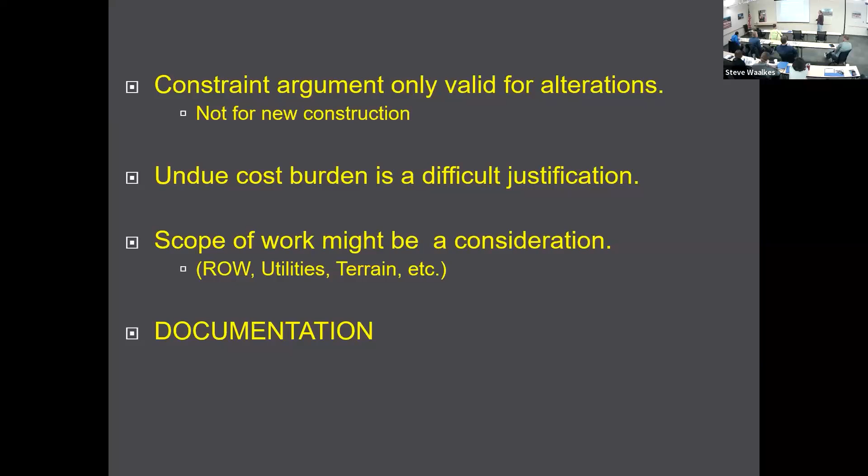Now, if the designer designs it fully compliant, and for some reason they get out in the field and look at the site assessment and there's obstructions here and there, we can't move this, we can't move that, we don't have right of way, construction has a 1105 form that we use on the construction side of things. Since this is a design training, I don't put that in there, but we have a form for our construction staff as well for non-compliant curb ramps.

Accessibility first. When full compliance is not practicable, think in terms of maximum accessibility first, then balance requirements, right? Like I said, don't make it less accessible. You want to try to build it to the extent practicable. You don't want to just apply the standards as a cookie cutter, because it'll make things less accessible sometimes. So, yeah, don't make things less accessible.

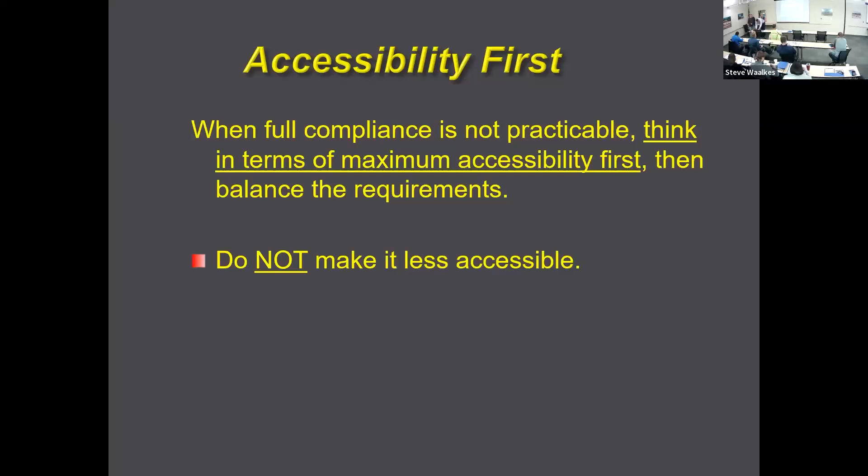Change down there, but not up here. Yeah. I believe it's just thinking. It's either slow or lost the connection. I only have a couple more slides. Unstable, it says, the internet. I just got a message. There we go. Well, yeah, don't make things worse. Oh, no, but I shared, you want to share it? Shared it, that's fine. There you go. It's coming back. There we go. Well, don't make things worse.

So I think I only have one more slide anyways. I just want to do a quick summary of the presentation that hits some key points. At the beginning of the presentation, we talked about there's no construction tolerances on the maximums or minimums: the cross slopes, the running slope, the ramp slope, 8.3%, the 5% counter slope. Detectable warning surfaces are not for wayfinding. We want to use the ramp to line up origin to destination.

The grade breaks, we want to try to get those 90 degrees to the ramp path of travel. And then I want to nail down that directional ramps are ideal. If we can get those in, those are the ideal way of optimal wayfinding. So if directional ramps can fit, let's try to get those in there. The 15-foot rule for chasing grades, remember, that's not an absolute maximum like the construction tolerances. You can consider reasonable increases in distances to try to achieve a compliant running slope.

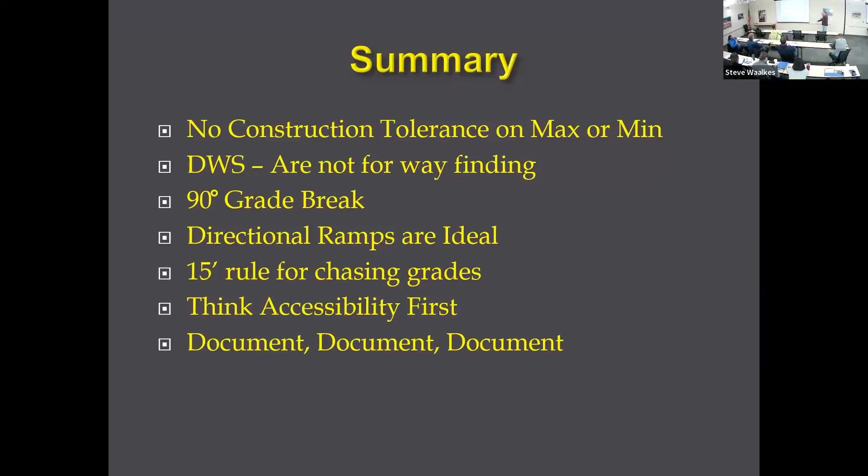And then, of course, documentation. We talked about that. If it's not compliant, you want to document it. If you have something complicated or if it's worth documenting, you should consider doing that as well. Keep everything with the project files. I think that was it for me. If you guys had questions, I'm open for questions.

Yeah, on that 5% counter slope. Is that the delta between two slopes? Let's say you've got 8% coming this way. Are you saying you can have 13%, 8 down and then 5 up? I guess I lost you on what the 5% is relative to. Yeah, it's not a delta, it's not a difference between the two. You just want to have that 5%. It's hard to explain, but you don't want more than 5% counter slope between the ramp and the gutter pan. So when they come together, it has to be less than the 5%.

On the ramp, right? If you're coming down a ramp at 8% and then you have the grade break, from the grade break to the back of curb, you're trying to keep it at roughly 0 or maybe a slight slope, and then a max of 5 in the gutter pan. Is that what you're saying? Yeah. That area is between 2 and 5%. Did that answer your question, Adam? I think so. Okay.

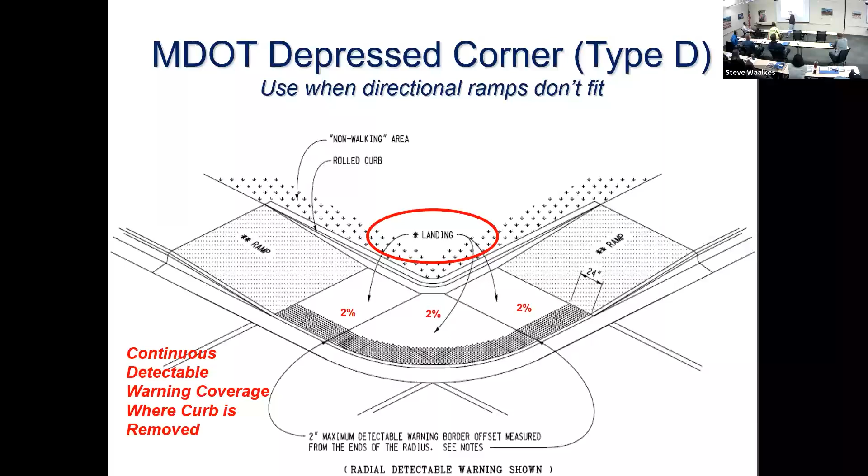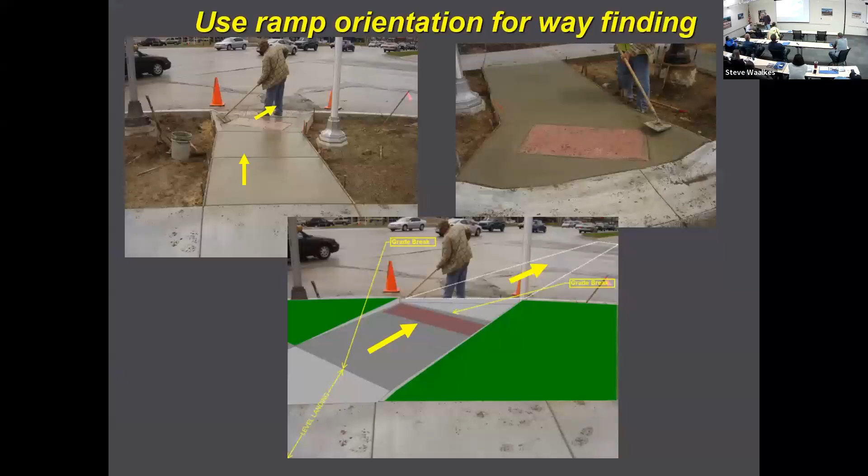What is the guidance to transition between cross slopes over 2% to the required 2%? Yeah, that was the slide I had earlier, so we gotta go back up. Let's see. Keep going. Right there, that's fine. Okay, so, from greater than 2% to the required 2%.

So basically, I don't know if they can see this or not, but you want your 2% cross slope right there, right? Your last ramp run is gonna be a 2% cross slope, it's gonna be compliant. Your transition slab is gonna start at your 2% cross slope to match your ramp run, to be compliant.

And then you want to transition over the full length of that transition slab to match the existing sidewalk. So let's say your existing sidewalk is at a 4% cross slope. So you'll start at 2% to match your compliant ramp run, and then you would transition over the entire transition slab to the 4% cross slope to meet the existing sidewalk, or whatever the existing sidewalk's doing.

If it's sloping even the other way, you'd have to kind of warp it even the opposite direction. Yep. Whatever you need to do happens over the full length of that transition. Similarly to that one slide I showed you where we had the landing at the top, where you have to meet the road grade at the bottom. You start at 2% at the top and it's something greater than 2% at the bottom to match the road, same idea. So that's that one.

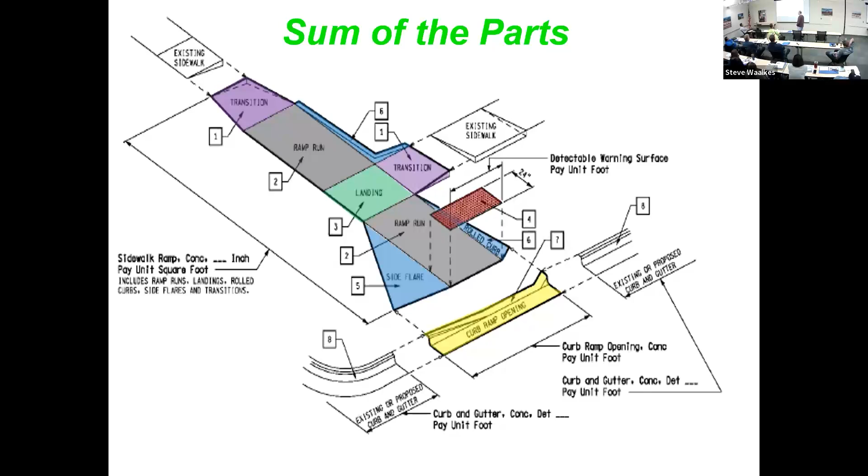Let's see, when referring to detectable warnings location, before or after the grade break, is there a document for reference to MDOT standards? Okay, it's in R28J, it's on page 6 of R28J.

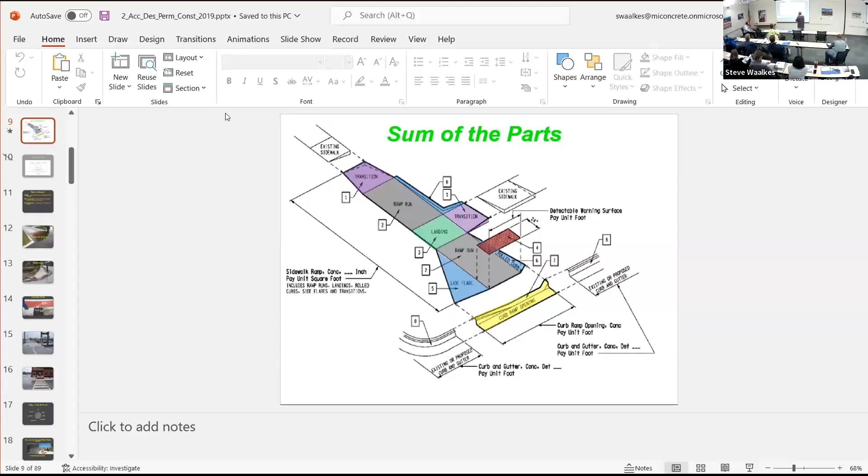Let's see. Can we bring that up? We can probably bring that up, I just need to move a couple things. Oh, I didn't cancel anything, did I? Michigan.gov, wrong. That's too many computers. I would have just Googled R28J. Okay, that's easier. Standard plan, right? Standard plans index. All right, let me go back and share my screen here. Oh, it's down at the bottom there. It should be on page 6.

Yeah, right there at the top right, there we go. So basically it says if it's greater than 5% or 5 feet, then the detectable warning surface has to be located behind it, at the back of curb. If it's less than 5 feet, it goes behind the grade break. That's the answer to that question.

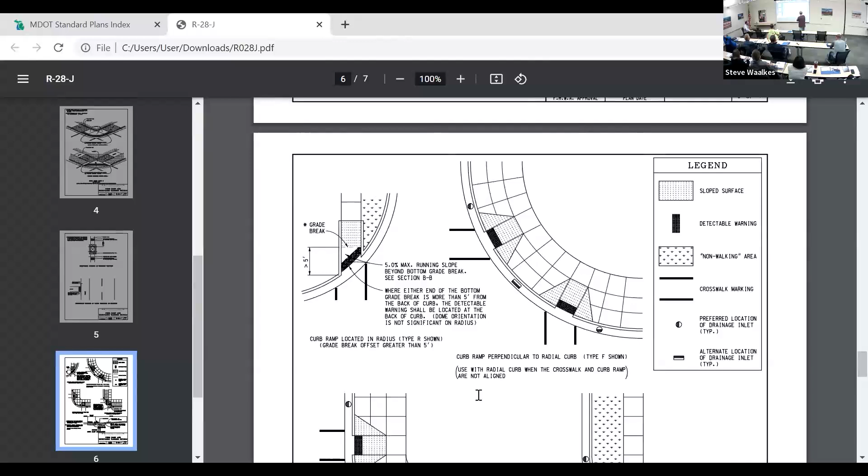We've got 2 more. All right, I can close this, I think. We go to Q&A here. That one was answered. Oh, that's what we just did. Obstacle, we did all those. Done.

DWS at railroad. Detectable warning surface at railroads: if there's a paved surface adjacent to the pedestrian pathway, does the detectable warning surface need to extend across the entire paved surface?